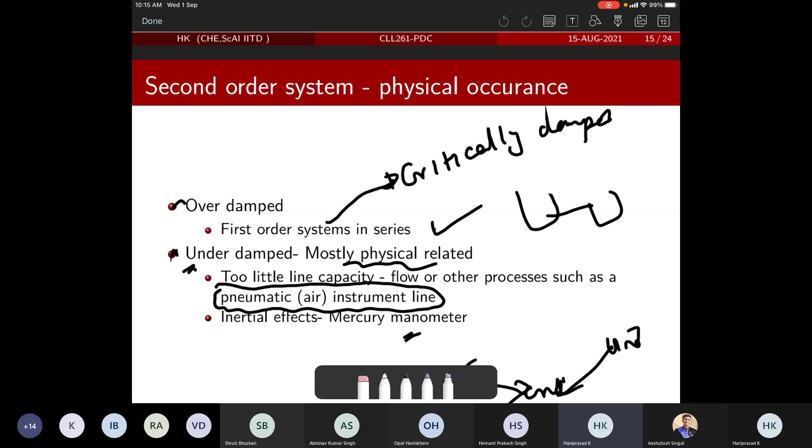So we'll talk about this U-tube manometer thing in due course. Meanwhile, so again, the same slide is here. So we are looking for systems that have different characteristics. The simplest, of course, is first order, which essentially means that their underlying model is a first order ODE. Or essentially, the other argument is the Laplace transform, which is the transfer function, where the denominator of the transfer function is of order one. So either of these things.

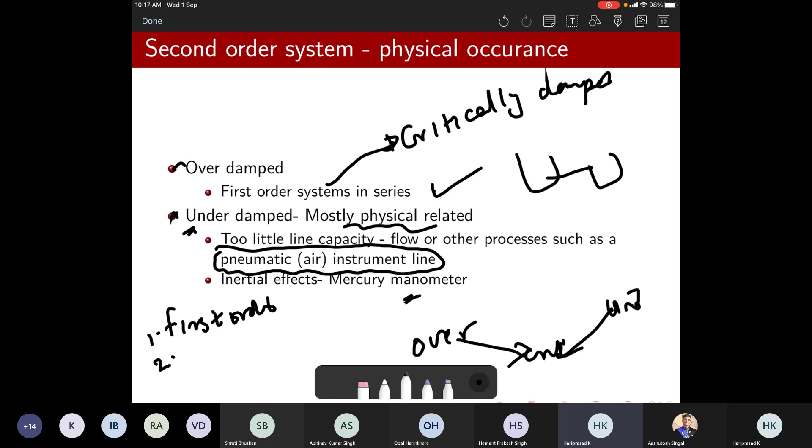Okay, give me a minute. Now I think I'll be able to show the U-tube manometer thing. Just give me a minute. Okay, so let me share my screen here.

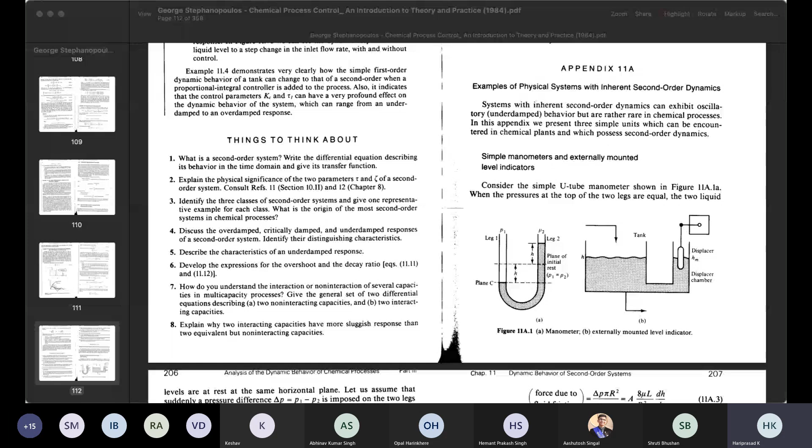Could you guys see my screen? Yes. So see, whatever you see as 11A1 is a U-tube manometer, correct? Hello, am I audible? Yes sir. Okay, so let's say you have this, of course it has two legs, leg 1 and leg 2, and you would put some fluid inside that, okay? And let's say then you figure out some initial reference, which is shown as this dotted line over here, you see that? And from that reference line, you tend to model the height of the liquid above or below that. Fine.

So now when things are at rest, you see the left meniscus and the right meniscus, both of them stay static. Let's say now you use some instrument to blow air into either of these legs, leg 1 or leg 2, whichever side you like. So then what would happen?

The air would compress the fluid, rather push the fluid down. Let's say we are doing it from leg 1. The air would push the fluid down on leg 1. As a result, the leg 2 level will also go up.

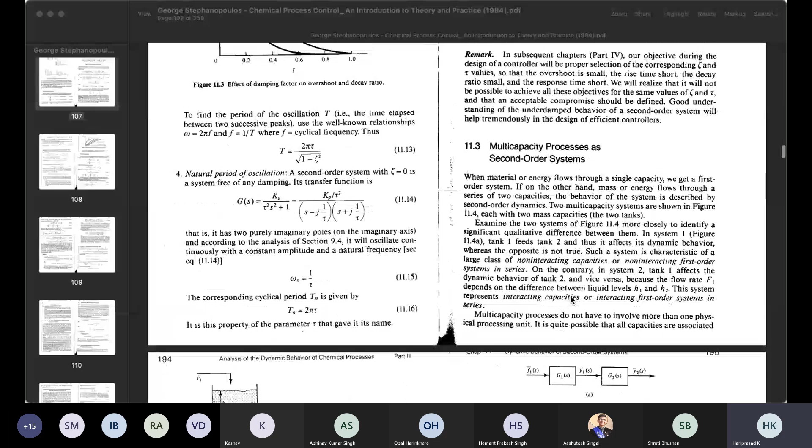So during that time, when you plot the height from a reference point in the U-tube manometer as a function of time, you would see that it would tend to oscillate something like this. When you look at the height, it would go up, then come down. Due to friction, that pressure would keep on decreasing. The next round it would go less up, then less down, and finally the liquid in both legs would settle.

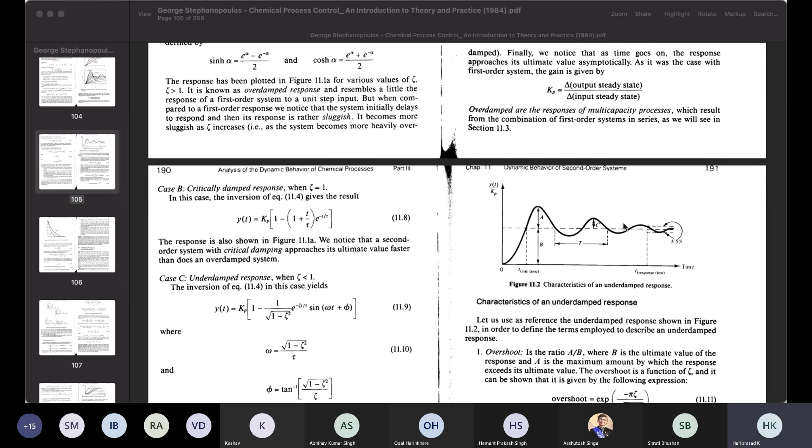So this is an example of a second order system. Why does it become a second order system? When you try to derive the transfer function, or when you try to derive the ODE, how do you derive the ODE?

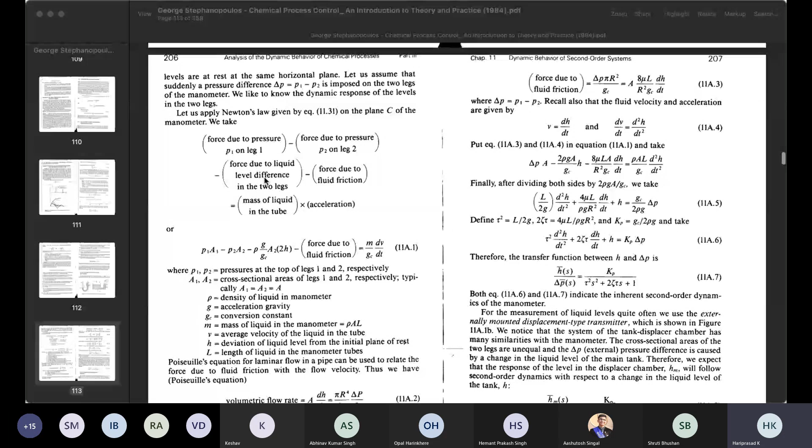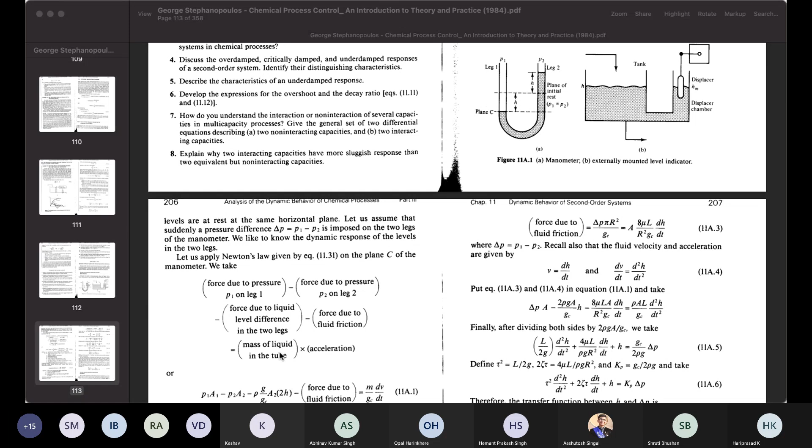We have seen in the tank system, you will have to do a force balance. Similarly, here also you will have to do the overall force balance: pressure applied in leg 1 minus pressure applied in leg 2, due to the difference in pressure. If there is friction, you add it, and this would be mass times acceleration. Rate of change of momentum would be mass times acceleration.

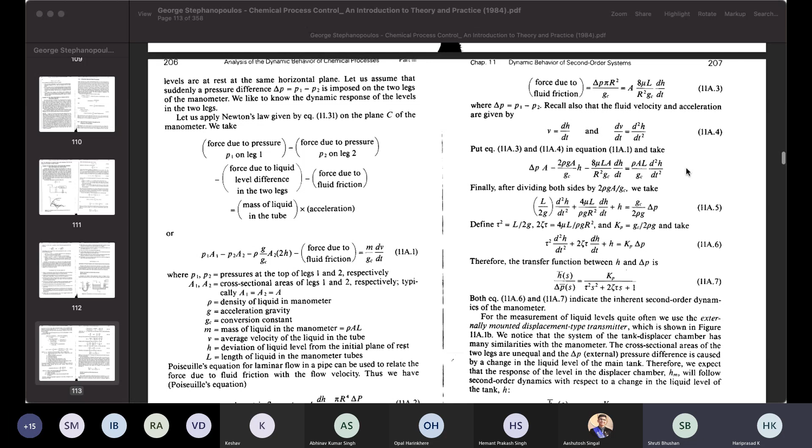Then when you apply the Laplace transform, you would see that it turns into a clean second order system. Is this clear now? Yes, sir. Okay, any questions related to this? Is this okay?

So then I think let us continue if there are no more questions. We will continue with the second order systems. So that's why it's a second order system.

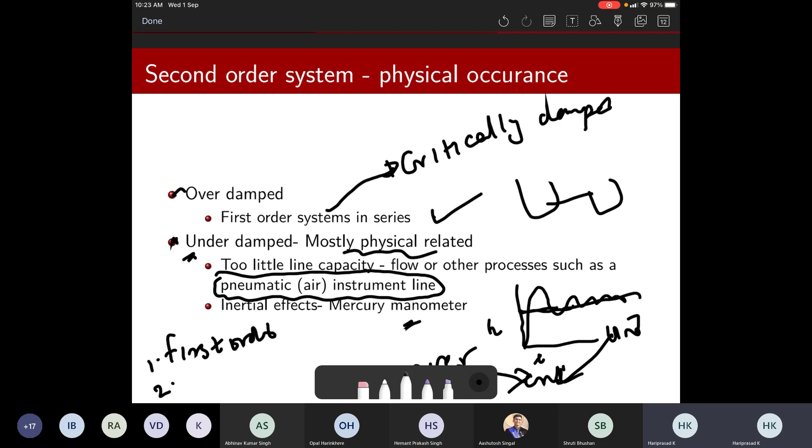So again, the U-tube manometer is a second order system which is underdamped. Why is it underdamped? You see the height versus time, from a reference line, and you would see that it keeps on oscillating and finally gets converged. This essentially means that your system is oscillatory, which means that your zeta value is less than 1, which means it is an underdamped system.

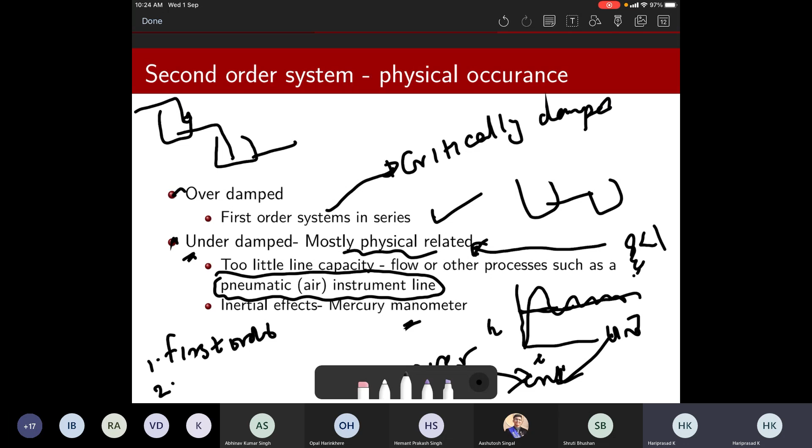That's why it is called so. It is mostly physical in nature. Unlike two first order systems connected in series, here you are not constructing anything. It's the normal system, you just operated it. So it is mostly coming from its original operation, which is physics governed.

So we have now seen the first order system with various inputs, which are step, ramp, and sinusoidal.

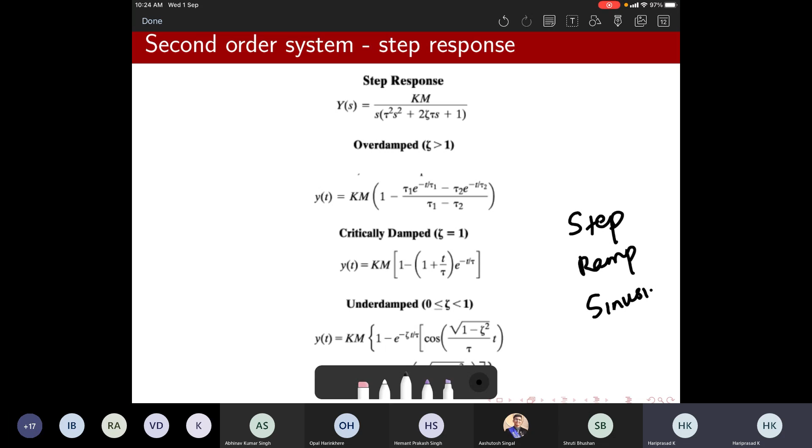Similarly for second order systems, we'll have to look at these standard inputs that you would really apply, and see how the system responds to these three inputs. Let's start with the step response.

What is our Y of s? Y of s by U of s is equal to k by tau square s square plus 2 zeta tau s plus 1, and U of s is a step here, so U of s becomes m by s, where m is the magnitude of the step. This magnitude, with respect to time, is m.

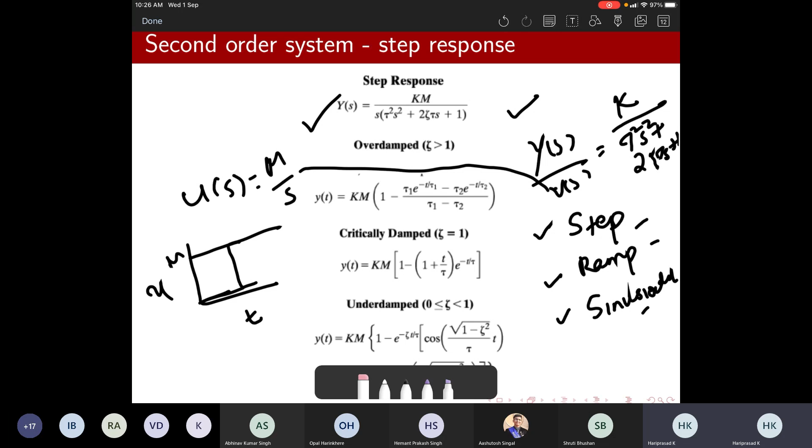So then what will you get as your Y of s? You have to just multiply k times m by s into 1 by tau square s square plus 2 zeta tau s plus 1. So now, unlike the first order system, when we take the inverse of it...

Three different conditions would arise here. We are not going into the derivation, but if you need, you can take a look at the step response shown in the textbook. Unlike the first order system, the additional parameter here, zeta, would play a key role in deciding the process characteristics.

In first order systems, a step response gives only one response. Here, depending on the value of zeta, three different conditions arise: overdamped, critically damped, which is close to two first order systems without any damping, and underdamped, which is an oscillatory system.

If you look at the underdamped system, your output is oscillatory with respect to a step input. The simplest way to visualize this is that you would have some sine or cosine terms in the response.

To characterize this oscillatory response, it's highly a function of zeta, because the effect of zeta will determine the level of oscillation. But how do you get this expression again?

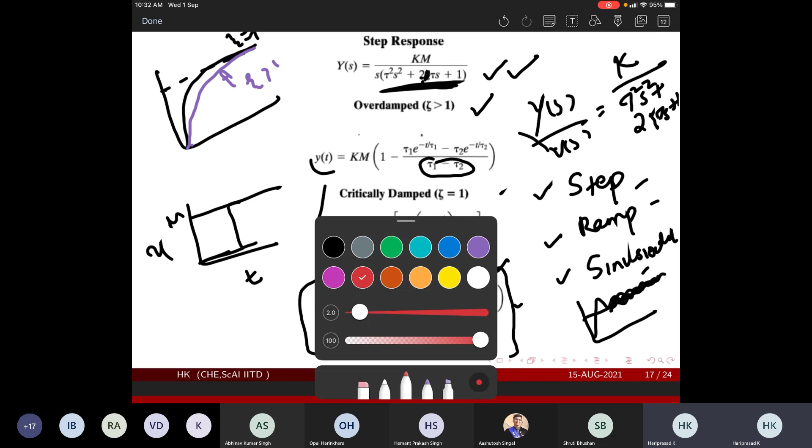So this is the zeta value greater than 1. Here it is zeta equal to 1. And the third is of course the underdamped condition, which essentially means the response would be oscillatory in nature.

So any questions so far?

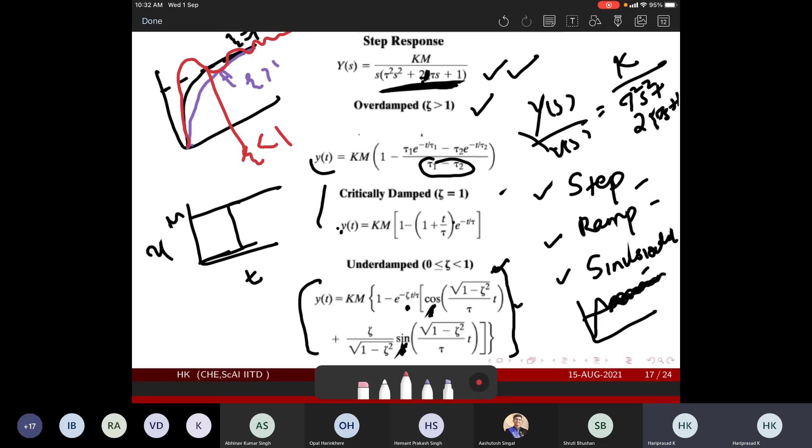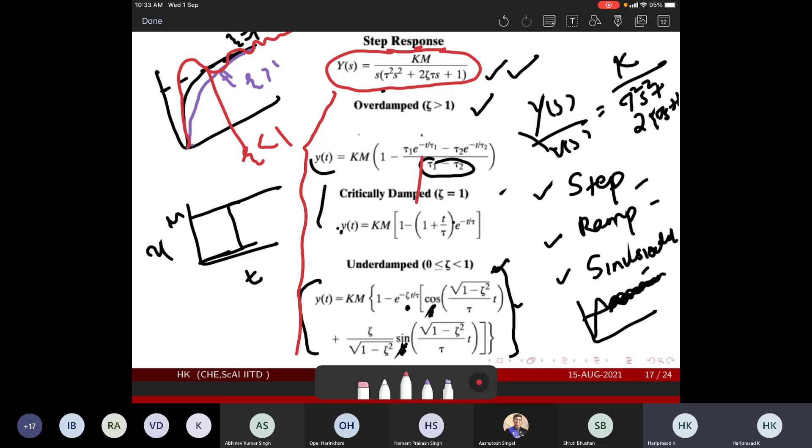And how do you get it? As I told you, take this Laplace transform, just take an inverse. But the difference you need to take a closer look at here is that your zeta is also coming into the system, so your roots would be a function of zeta. That's why three different categories of results emerge: when zeta becomes 1, when zeta is greater than 1, when zeta is less than 1. So these are the three roots that you would really need to deal with.

When zeta is greater than 1, it would be real and unequal roots. When zeta is equal to 1, it becomes real and equal roots. And when zeta is less than 1, it would be complex conjugates. Roots of the denominator polynomial.

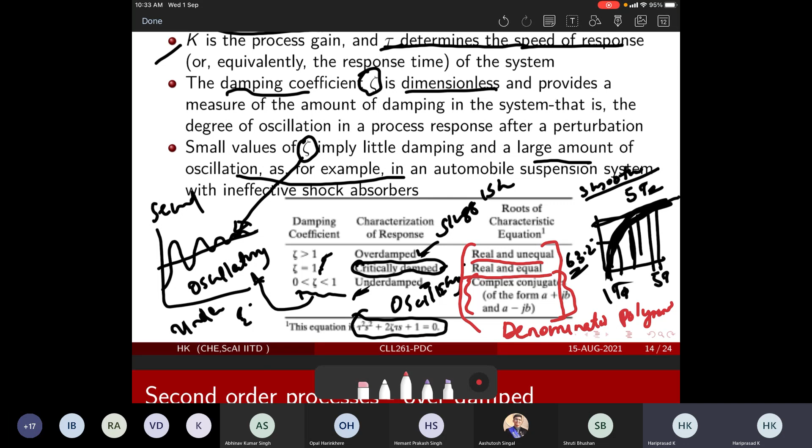Any questions here? Anything that requires more clarification?

So this is a more pictorial representation, showing y by KM, which is the normalized response, and t by tau, which is the normalized time. If you look at the expression, everything would be y equal to KM, so y by KM would be a normalized response, and t by tau would be the normalized time. So you plot them against each other.

What you would really see is that if the zeta value is smaller, the level of oscillation is very high. And as the zeta value keeps increasing, we are moving from the underdamped to slowly to critically damped condition. When zeta becomes 0.2, you see a lot of oscillation, and you would see a progressive decrease in the oscillation as the value of zeta increases.

So at 0.8, this is more or less clean, the oscillation is more or less damped. Still there is some oscillation, but it's much better.

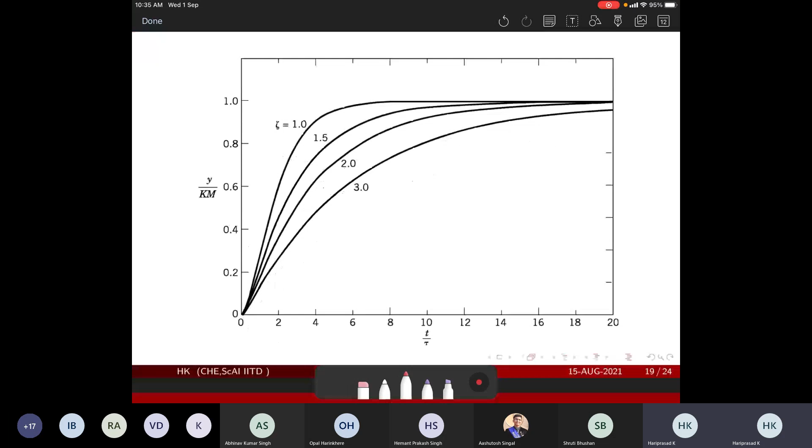And when you see the other extreme, which is the zeta value equal to 1 to greater than 1 - equal to 1 is as if it would highly resemble a first order system. What is happening is that as you increase zeta, the oscillations are decreasing, but your process is also getting sluggish, your process has become slow. So zeta equal to 1 is the ideal case: no oscillation and fast.

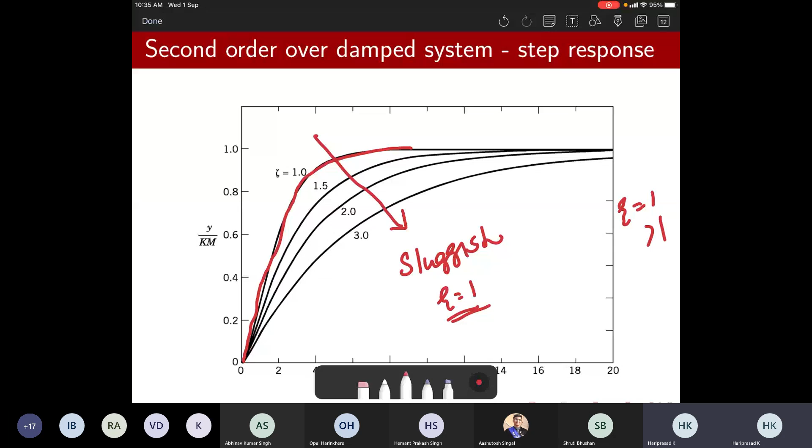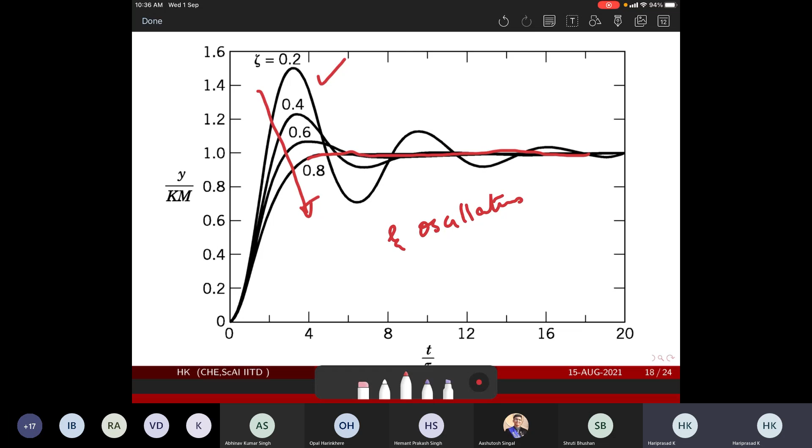Here you see a lot of oscillation and the process would settle only after a long time. This oscillation keeps going. Though these oscillations technically are not desirable, because it essentially means your system keeps on vibrating, be it a reactor, a manometer, or an automotive vehicle.

So the ideal response that you could think of is zeta equal to 1. If you are somewhere here, you tend to move towards this line, and if you are here, you tend to move down to this line, which may be the best possible case - this could be your zeta equal to 1. And how do you do that?

As I told you, underdamped systems are generally physics related. You could think of, for instance, a U-tube manometer wherein water is the fluid, and you would see it getting oscillated, and that is what we have seen.

So can someone tell us some way to decrease the oscillation of such a system? There are multiple ways you could do it physically. Can someone say what are some intuitive ways of reducing the oscillation, which essentially means you are moving from underdamped character to critically damped character to overdamped character? Can someone think and tell?

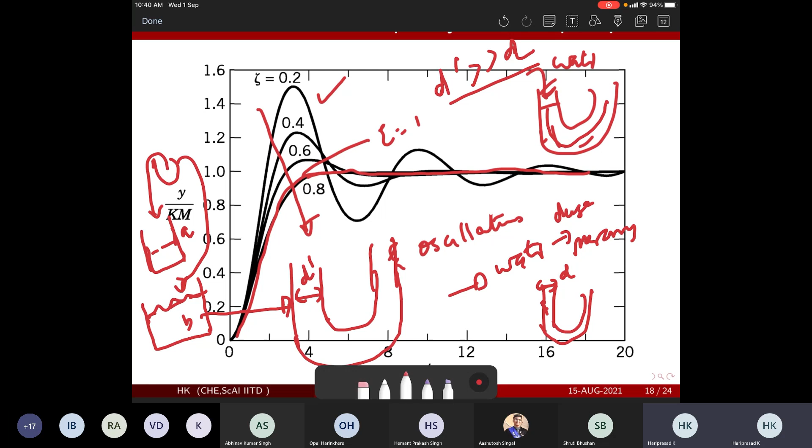So the same logic applies here. You have increased the cross-sectional area, which essentially means more capacity. More capacity means that even if you add more water or put pressure, because of the high capacity, this results in more inertia. More capacity means more mass, which again results in more inertia. It's easier to push a smaller object compared to a larger object. So here, this would also reduce the oscillation.

So by doing so, these are some means, just as an example. You could physically think of many other means of how to convert your underdamped case to an overdamped case.

Why? Another typical example is automobiles. Let's say your vehicle that you're going to travel in on a highway. If the vehicle is lighter, maybe 1000 cc or 800 cc, it would tend to vibrate a lot. You would feel the difference when you drive on an expressway; it would tend to oscillate a lot. And if you're driving a heavier vehicle, for instance 1500 cc, let's say an SUV versus a small hatchback car, you would see that the overall vibration is much lesser if you are going for a heavier SUV. Same reason.

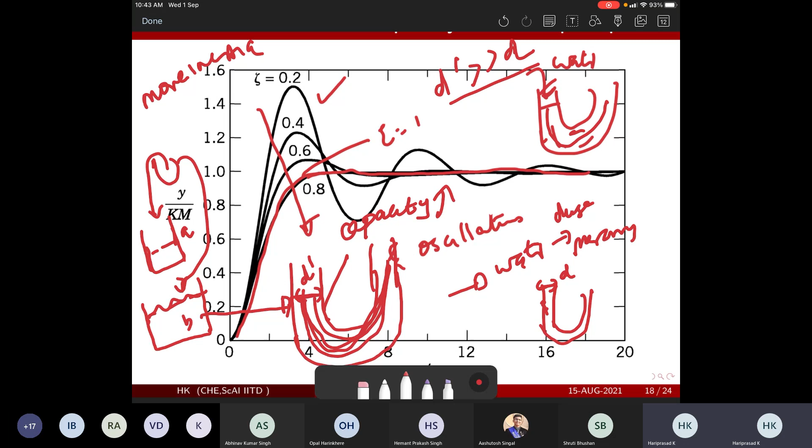So this is fun. What is happening? You are moving from an underdamped case to an overdamped or critically damped case, or you might have just reduced the underdampedness, either by increasing the overall capacity or density, so you increase the weight. The same principle applies here. I'm trying to connect you with the physics. So if you really need to change this character, you have to go back and do something in the system itself. Any questions here?

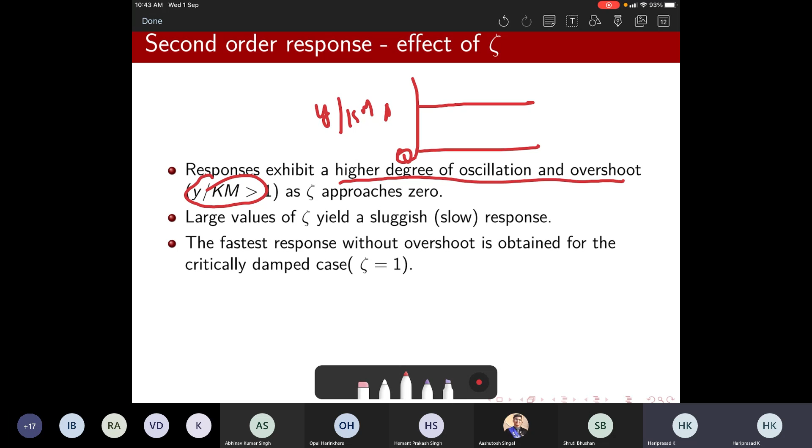Okay, so now let's summarize what you have told. The responses exhibit a high degree of oscillation and overshoot. There is a character called overshoot. You are interested in retaining, let's say, y by KM, normalized response, 0 to 1 as the maximum that you wanted. But due to the presence of this oscillation, it goes beyond 1, then finally settles at 1. This is the undesirable excess response - this is basically the overshoot of the system, because you really wanted to be here, but your system, due to its inherent characteristic, ran away from the original point.

And on the other hand, a larger value would result in a slower response, and it would take a lot of time to converge.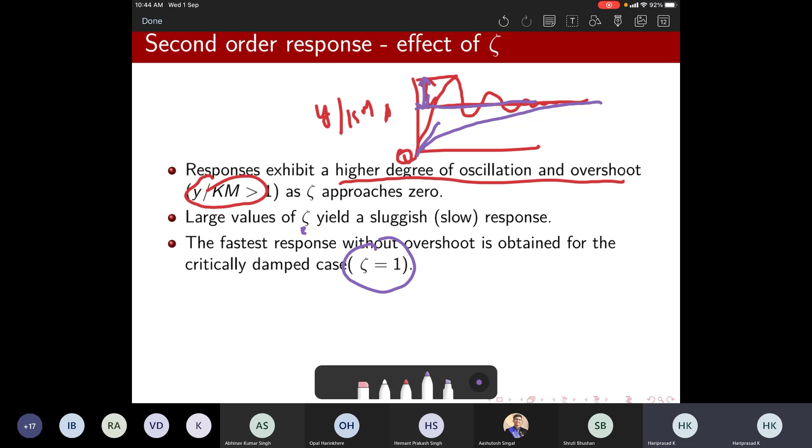As I told, the middle ground is zeta 1, which is the fastest with lesser overshoot, which is the critically damped case.

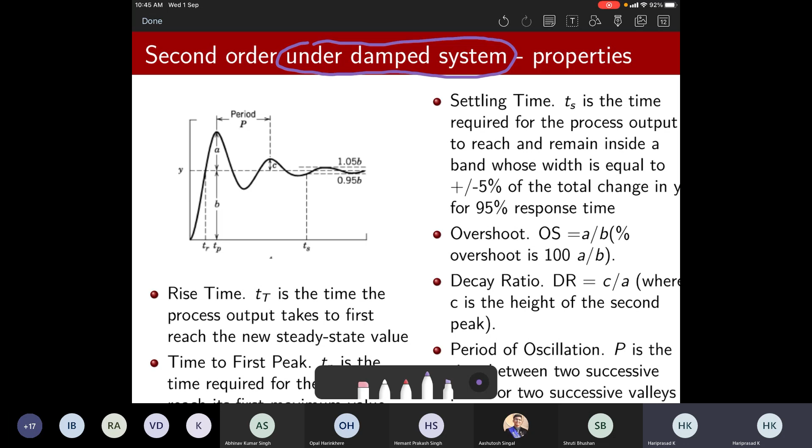So there are various characteristics of second order underdamped system. You can specify some of the properties. This is the response you would really see for a second order underdamped system, which means it goes out. This is your target, but it went ahead and came down, oscillates, and finally settled. So if you're given such an output profile, there are various parameters defined for underdamped system.

One is rise time. Rise time is the time taken to reach the steady state value. So you really wanted to be here at this level, let me just draw this. This was your aspiration, you wanted to be here near the red line, but due to the underdampedness, it went above and then kept on oscillating. So the time taken to reach and touch this red line for the first time is called the rise time, TR.

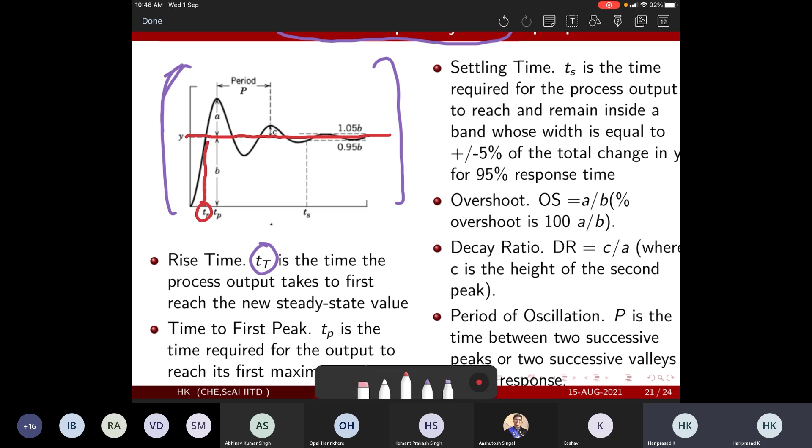And so rise time is not the settling time. Rise time, because the system overshoots, then keeps on oscillating, and finally after a long time it will settle.

So then what happens is it goes and reaches its first peak, and there are multiple such peaks before it settles. Then similar to rise time, there is also a property called time to reach first peak, which is TP. This is time versus output, the time taken to reach that first peak.

So then settling time. Eventually your process tends to, after a long time, slowly settle, and it would remain inside a small band with 5% difference compared to the final output. So 5 percentage, even let's say your output, your y by km value is 1, so it would tend to be between 1.05 and 0.95, and eventually all this would decay. But you can say when it becomes this band of 5% above and below, the process is settled.

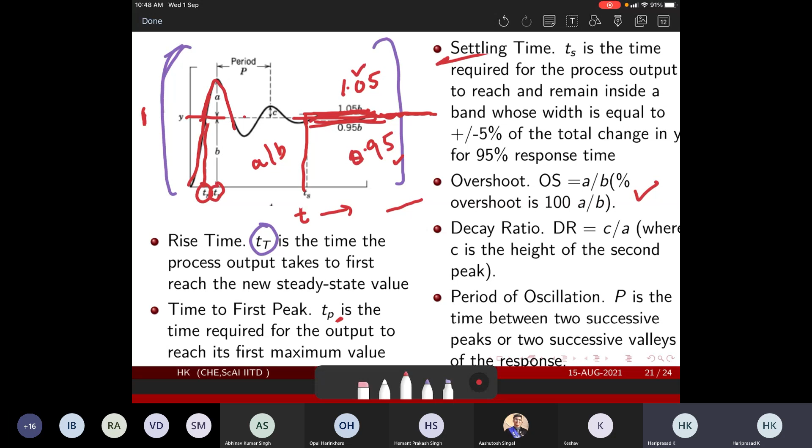And also there is something known as decay ratio. So what is decay ratio? Decay ratio is, so your response keeps on decaying, you see it would keep on decaying, which essentially means the first peak height, second peak height would be much lesser than the first peak height.

So decay ratio, which means how much the process decays, will be the ratio of C by A, where C is the height of the second peak and A is the height of the first peak. So the level of process decay obtained could be computed using C by A, and of course the period of oscillation. Period of oscillation is the time between two successive peaks, then you would have the next peak here. So they are all most likely going to be the same.

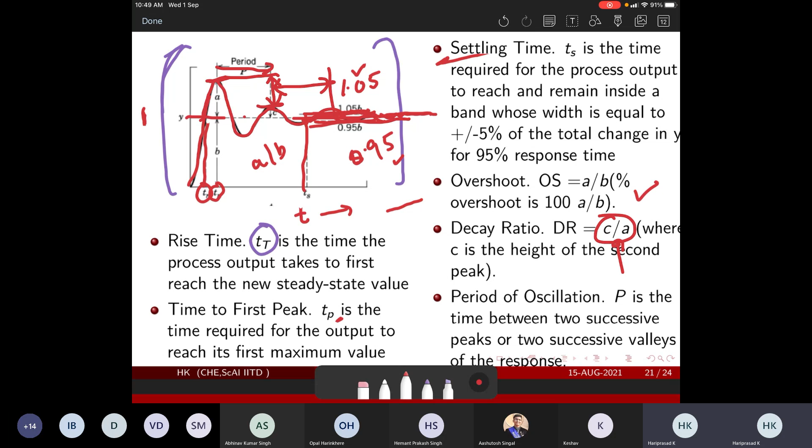So these are certain characteristics that define an underdamped second order process. So you have a rise time, then a time to reach first peak, then there is a settling time, then there is an overshoot, decay ratio, and finally period of oscillation.

So any questions at the moment? No, sir.

Okay, so now why are we defining this? If you look at a response, and when you plot it, you will be able to calculate all of these parameters. So you only need a graph.

If you plot, let's say you are sitting, doing an experiment in the lab. You took a stopwatch and started noting H versus time for the U-tube manometer, or even height versus flow rate for the tank, and you collected all of this information and plotted it.

And so these are directly coming from the data, there is no expression used in calculating all of this. Once you plot this, you will be able to calculate what is A by B, what is C by A, what is TR, what is TP and TS.

Now there are expressions that connect you with this and your zeta, which is your damping factor. So if you compute the time, and also tau, which is the time constant, and zeta, when you get your time to reach the first peak, this is officially computed, so this is the expression for the time to reach first peak.

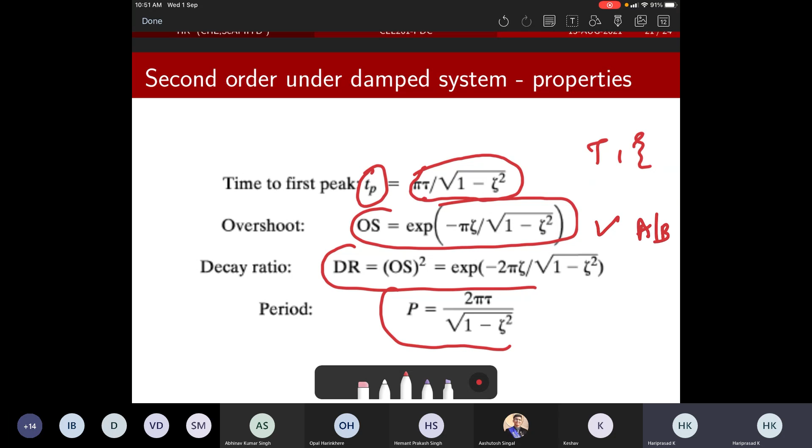And you know these numbers on the left hand side because this is coming from the graph, A by B or C by A. And you see this is just a function of zeta here, because pi you know, and exponential. So if you know the decay ratio or overshoot, you will be able to calculate the value of zeta by inverting the expression.

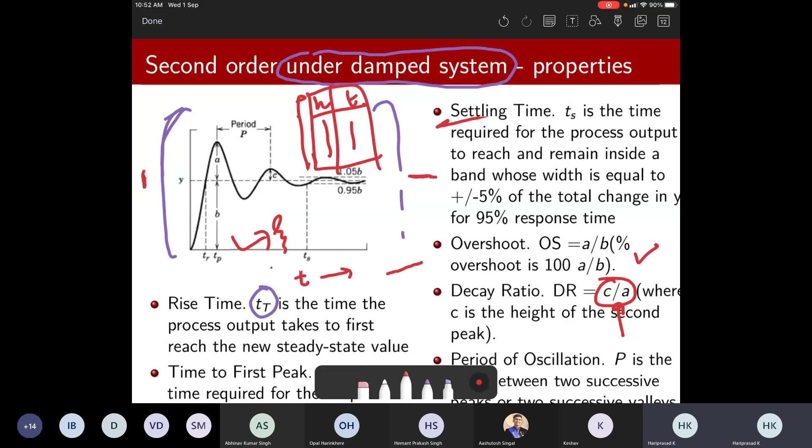Similarly, once you get your zeta, you should be able to again substitute zeta in the expression for period or time to reach first peak, because you will be able to get the time to reach first peak from here, or computing the period from here.

So what is unknown? You got it. So you used overshoot or decay ratio to compute zeta. Then once you have the zeta ready, you plug in over here. The only parameter that is unknown to you is tau. So you should be able to get that tau back.

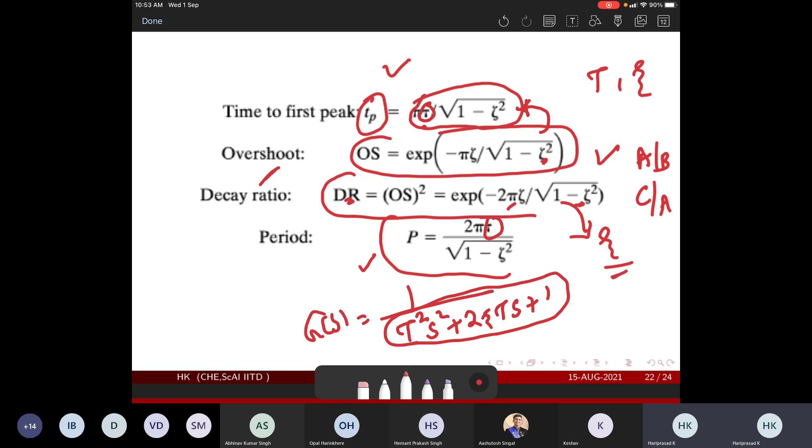So then your model is simple: tau square s square plus 2 zeta tau s plus 1. So you should be able to get your system output back, or the model structure back, by just looking at the graphical profile and equating with the standard expression.

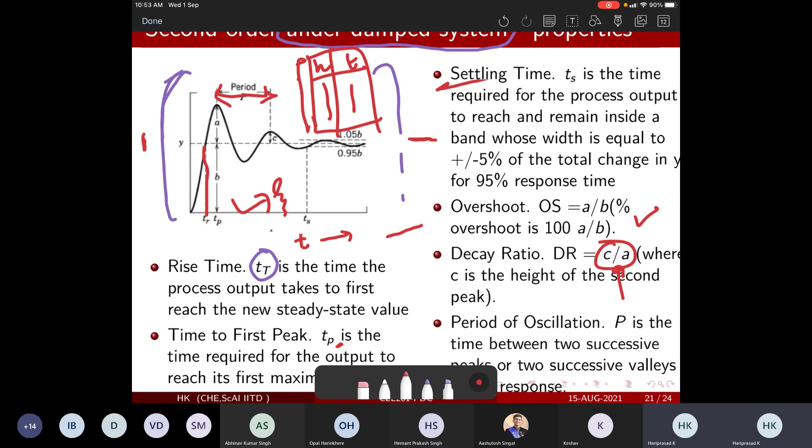So when you plot this and evaluate it experimentally, when you do a numerical computation to calculate the period and so on, you should be able to relate them with the original expression. That would help you to backtrack and compute the values of the damping factor and time constant.

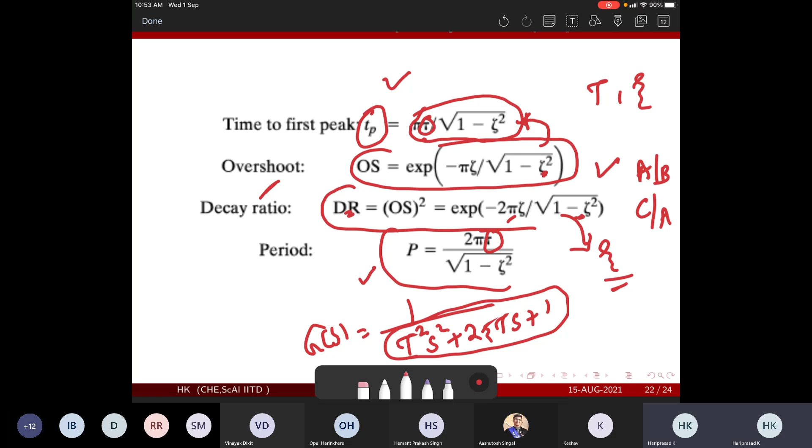Okay, so what we have seen was a second order system with step response. You can also have a sinusoidal response.

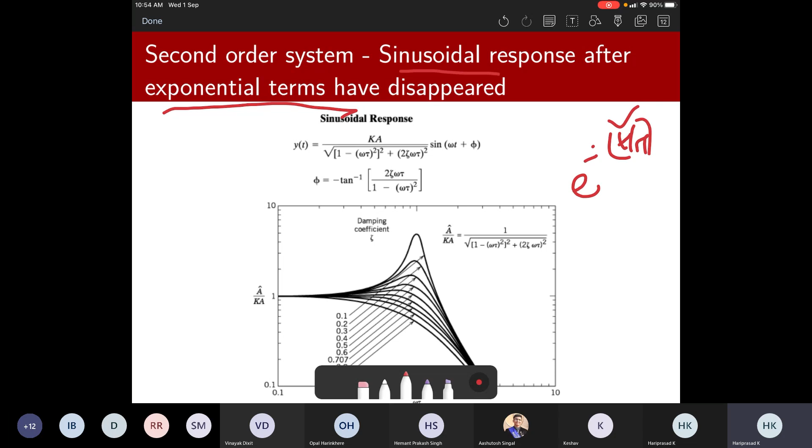Again, the details are skipped for brevity, and we would see that after the exponential terms have disappeared—everywhere when you have the exponential term, it would always be a negative exponential—so when the time becomes large, or t by tau becomes larger, this term would eventually contribute much lesser.

So then the output for this particular case, after the exponential terms are resolved, it would also be a sinusoidal expression. You would see this expression in the textbook, and it would be a sin omega t plus phi form, where phi would be computed like this.